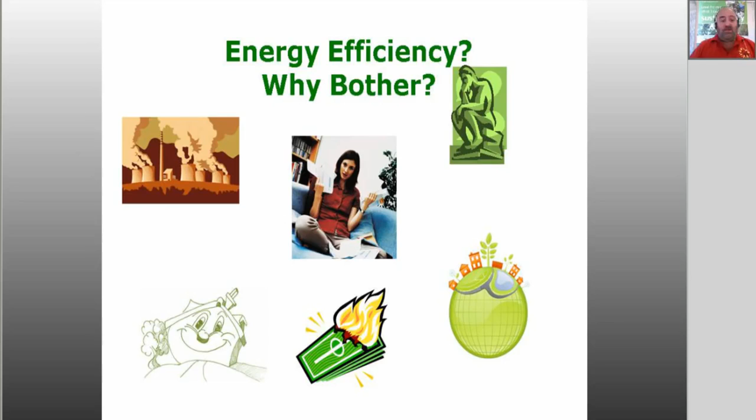Now, there's going to be a combination of slides. It may look like we're jumping backwards and forwards a little bit, but bear with me. It will all make sense at the end. So let's go on to the next slide. Now, what is greenhouse? One of the main drivers, of course, for the ATA is sustainable technology to improve the planet, or at least to reduce the harm that we're causing.

And a lot of people get confused about what is greenhouse, what is greenhouse gas, and what are greenhouse gases, and what is the impact. Now, if it wasn't for the greenhouse effect, we wouldn't be here, because it's a natural part of the Earth's atmosphere.

And this is how we've evolved. We've evolved in this temperature range. Now, if things change, and they change quickly, we could be in a little bit of trouble. So the enhanced greenhouse effect, what we're doing now is, with fossil fuel burning, etc., putting extra greenhouse gases into the atmosphere, which is trapping a bit more heat.

Now, the impact of that is you still have to have an energy balance. In other words, all the energy coming in from the sun has to match all the energy leaving, or otherwise the temperature rises, and that's exactly what we're seeing now. The temperature's rising, and scientists predict that we could have a 1.4 to 5.8 degree temperature rise over the next 100 years, with potentially devastating effects on our societies and well-being.

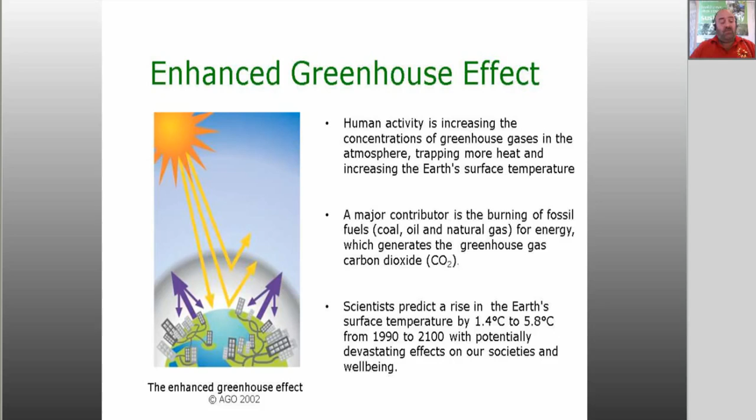Now, so how do we avoid all this, and how do we make our lives more comfortable, and how do we ease the pain on our hip pocket? And one of the answers, of course, and one of the things you can do personally is energy efficiency in the home. So let's have a look at the Australian energy home use.

Now, I haven't broken those down because there's no good reliable data as yet that I've been able to find. But there are things like televisions and stereos, home entertainment systems, just all the odds and sods, mobile phones, computers, all those sorts of things just add to that. But by far, heating and cooling and water heating are the main components. And there's also a fairly good slice of lighting and refrigeration, which we can do something about straight away. And so they're the aspects that we're going to talk about.

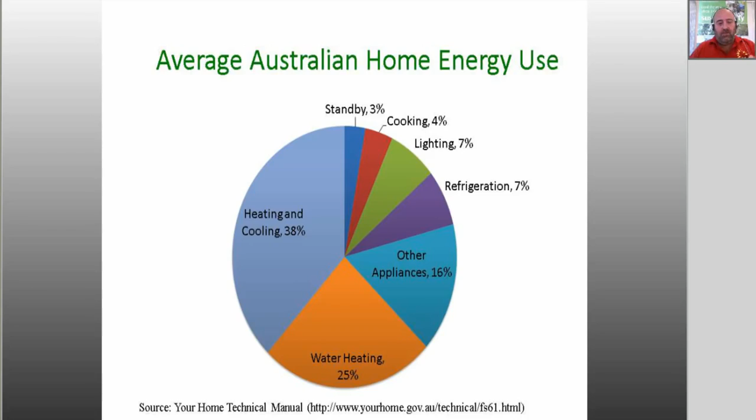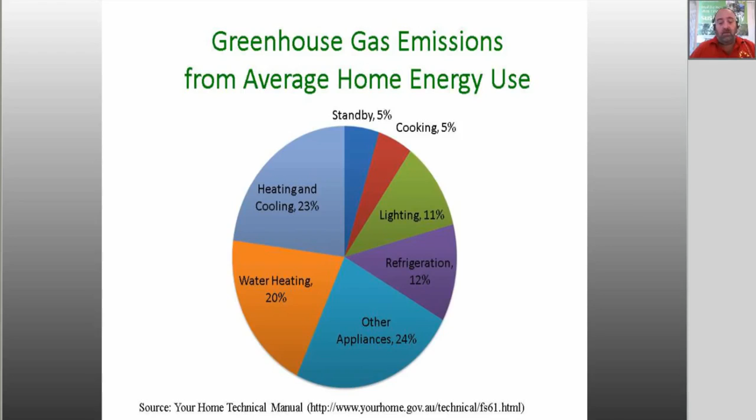Now, comfort zones. Most people are very surprised to find that we can actually cope with quite a wide range of temperatures, and most people are comfortable between 18 and 27 degrees. So the key is that 22 degrees, as some of the ads on TV have portrayed, is not the ideal temperature. The ideal temperature is somewhere between 18 and 27 degrees.

Now, of course, some people will feel the temperature when it gets a bit warmer more than others, and some people feel the cold more than others, and that's to be expected. But by and large, anywhere between 18 and 27 degrees is comfortable for most people. So what you can do is, in summer, you can allow the temperature in your house to rise a little bit higher, and so keep it up around 24 to 27 degrees. Some people don't like it above 26, because every extra degree adds 10% to the cost of trying to keep your house cool.

So if you have a house that actually gets to a certain temperature and you're running air conditioning, if you keep the air conditioning up a little bit higher, or at least the temperature's up a little bit higher, then you'll save a lot of money for no real discomfort. And conversely, in winter, the same thing applies. You can drop the temperature down, not try and heat your house up so high, and it will also save you quite a bit of money.

Now, I had a friend who, in winter, would have a house so hot, up around 25 to 30 degrees, that as you walked into the house, you had to strip off down to your shorts and T-shirt, and it was just shockingly hot inside the house. And if you had the temerity to turn it down a little bit, she'd jump up and down and hurl abuse at you. But this same woman in summer would keep the house at 18 degrees because it was far too hot outside. So it depends on what people get used to and how they develop habits.

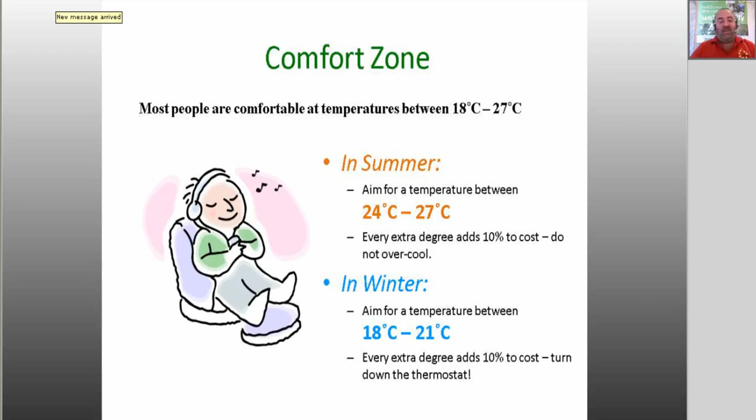And a lot of this is about habits, and one of the things that we will talk about is there's a difference between habits, behaviour, and retrofits, so turning that up, down, putting on a jumper when it gets a bit cold rather than turning the heater on. Their behaviours, their habits, turning lights off when you leave a room. The other thing is retrofits. So putting insulation in your ceiling, for instance, is a once-off retrofit. You don't have to think about it anymore. So there are two aspects to that. As somebody said, warm slippers, long trousers, and long sleeves. That goes a long, long way to making you more comfortable when it gets a little bit colder.

So keeping your home cool. What are the key ways that you can keep your home cool? Obviously, closing windows and doors during the day to shut out the heat, controlling cross ventilation at night, in other words, allowing cool breezes to come in, and helping your home stay cool is designing for passive cooling, which we'll talk about in a few minutes, insulating, protecting your windows, and eliminating air leaks. And those, particularly eliminating air leaks, can play a big, big part.

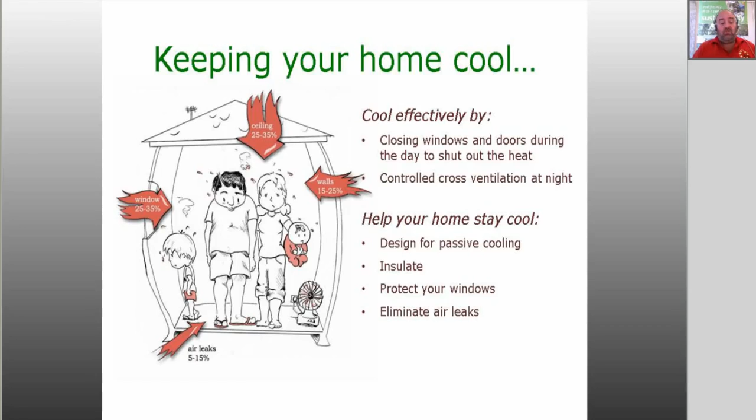So as you can see there's quite a lot of heat that comes through windows, through ceilings, through walls, and even through the floor, as we'll see in a minute. But if you look down the bottom there, you can see that air leaks contribute to 5 to 15%, and other studies have indicated it could be as high as 20%. So it makes sense to control some of those air leaks if you want to keep your house cool. And again, you'll be more comfortable when you do that.

Now, what about keeping your house warm? Well, using effectively a correctly sized heater, creating zones. In other words, don't heat up the whole house. If you're sitting in the lounge room, why heat up the bedroom? So creating zones so that you can actually heat up just the parts of the house that you're in. Using thermostats and timers. How many people have gone to work and forgotten to turn the heater off, and come home to find the house is sitting at a beautiful 22 degrees, and the cat looks up in appreciation when you've walked in the door because you kept the house warm for it all day. So having timers on your heating systems and cooling systems can play a big part.

In my house, because I've got restrictions in the number of zones that I can put on, I actually have a thermostat and timer which automatically drops the temperature down overnight, automatically switches everything off at around 8 o'clock in the morning when people are getting ready to work, and doesn't come back on until we get home from work. So if you do have an automatic system, make sure you use it because it'll make a big, big difference.

Circulating hot air. Now, it sounds funny, circulating hot air to stay cool, but we can actually cool down quite effectively if we have a moving airstream over our bodies. So if you have a ceiling fan, turn the ceiling fan on and direct that air over your body. It causes a little bit of evaporation and helps keep you cooler. However, when you leave the room, turn the fan off, because the fan by itself doesn't actually cool down the room. It cools down your body because of the moving air. So when you leave the room, turn the fan off, otherwise you'll just be wasting energy. And of course, wearing more clothes to reduce heating needs. Gets cold, put a jumper on.

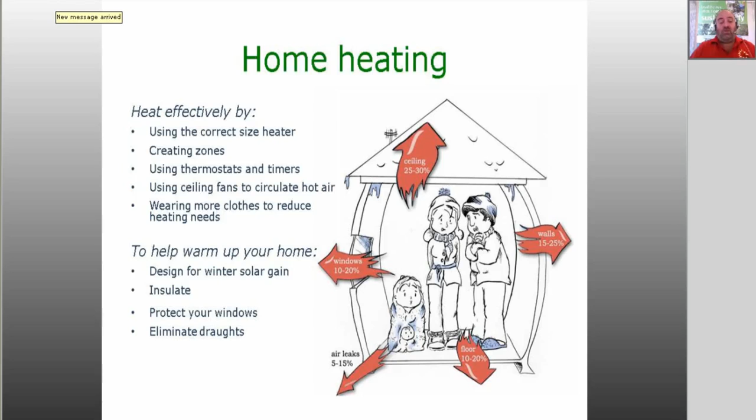So the three key things that can keep your house cool in summer are the same three things that keep your house warm in winter, and that's insulation, protecting your windows, and eliminating drafts. So keeping the cold air out in this case. And you'll see that there's some really simple solutions for eliminating drafts. The key thing you want to do when you're eliminating drafts is control the ventilation. So it's only controlling the ventilation when you want the ventilation, rather than when the wind outside decides you want the ventilation.

So what kind of heating? We're coming up to the winter season now, so particularly in the southern states it's going to be an issue, not so much in the warmer states. Now, types of heater. There's small portable heaters, single room heaters, ducted, whole house, and each of them have their advantages and disadvantages. But go with the ones that are going to do the job properly for you. There's no point getting a whole house heater if you spend all of your time in the lounge room, for example. There's also no point in filling up your house with several small heaters and trying to run them flat out to heat up your whole house. So it has to be the right size for the right job.

And that's very important. Now, small single room or portable heaters can be excellent for just sitting quietly in the corner, reading a book or watching a bit of TV. There's also gas, electric, reverse cycle air conditioning, and each of those have their advantages and disadvantages. Of course, gas isn't available everywhere. Not everybody has access to mains pressure gas, and even if you do use LPG, it usually works out 2 to 3 times the price. There's also greenhouse gas emissions associated with gas, which you can eliminate fairly simply with electric by using green power, which we'll talk about as well.

Now, electric, there's fan, radiant, oil column, and reverse cycle air conditioning. Reverse cycle air conditioning is actually quite a good system for heating up your home if you have electricity only, because reverse cycle air conditioners can be 3 to 4 times as effective as normal radiant, fan or oil column heaters to generate the heat because of the way they work. So when you're looking, and we'll talk about energy rating labels very soon, have a serious look at reverse cycle air conditioning for heating if you are restricted to electricity for your heating needs.

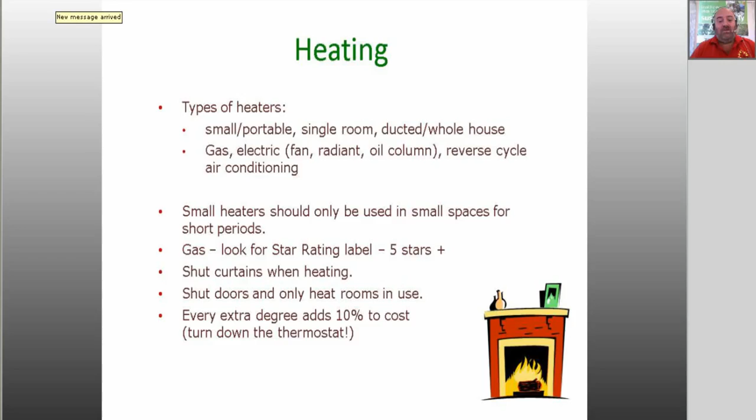Now again, look for star rating labels. Do the clever thing, shut the curtains when heating, shut the doors and only heat the rooms in use. And again, every degree that you raise the temperature adds 10% to the cost. So turn down the thermostat and put on a jumper. I met a guy who said he was a classic energy waster, that when it got a bit cold he turned the heater on, and then when he started getting hot he took his jumper off. So don't be sucked in by things like that. It's very easy to get into habits which are counterproductive, and going through and checking things will make a big difference.

Now, the other part of heating, passive heating and cooling, which we spoke about a little earlier, is simply letting winter sun in and keeping summer sun out. As we know, the sun rises in the east and sets in the west, and it does so twice a year. The rest of the time, the sun moves around in the sky. So it changes position where it rises and sets, and also changes its position up or down, depending on what time of the year it is. So you can see there that the winter sun, when it's low in the sky, can penetrate in, which is a reason that eaves are so effective in houses, and it's a crying shame that builders have chosen to get rid of eaves, mostly for cost purposes, but they've convinced people that they're not necessary and they don't look very attractive.

But having eaves on your house can go a huge way to getting good passive heating and cooling. So providing access to the low winter sun and excluding the high summer sun can make your house very comfortable, or a lot more comfortable, and also allowing cooling breezes to come in. So having a house set up, or even if your house isn't ideal, opening the windows in various parts of the house to let a cooling breeze come through can make a huge difference.

And as you can see in the diagram there, using deciduous trees that let in the winter sun but block out the summer sun is a huge advantage, as are things like vines or grapevines or something grown across the north side of your house. Now, the only problem with having trees and grapevines and things doing that, as we found out at the ATA workshop at the Ceres Environment Park, is that it doesn't always follow your heating and cooling needs.

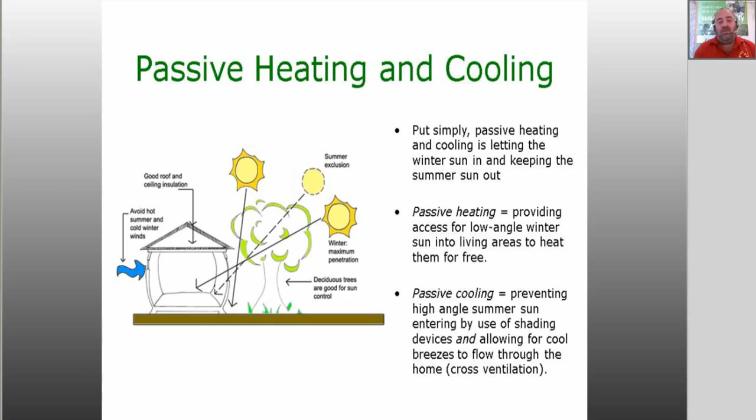So it may not be perfect, but it's certainly a lot better, but you may find that you still need to put some external shading up, or hack back the vines in some cases to get good autumn and spring performance as well. So just be a little bit aware of that. And again, with all of these things, it's all about looking to see what works and what doesn't work in your individual situation. Now, insulation is one of the key things that will help make your house more comfortable.

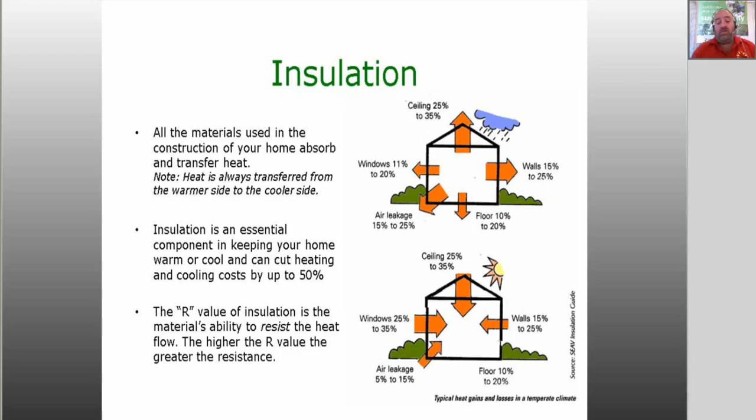Now, it's important with insulation to realise there's two kinds of insulation. The R value, by the way, is just its ability to resist the transfer of heat. Now, the two types of insulation are bulk insulation, which resists the transfer of heat, and it does that by trapping air. And air is an extraordinarily good insulator, provided it doesn't move around. So most of the insulation properties of bulk insulation, like fiberglass bats or cellulose fibre, is the air trapped inside the bats.

Some people make the mistake of thinking, oh, well, I've got an R2.5 bat, I'll shove another R2.5 bat in there and squeeze the two together and I'll get an R5 bat. But it doesn't actually work that way, because what you're doing is you're squeezing out the part that does the insulation, which is the air. So you actually end up with a worse performance by compressing insulation down in there.

The other kind of insulation is aluminium foil laminated onto paper or plastic. So it resists the radiant heat by reflecting most of it away, and it's also not very good at transmitting or radiating that heat away when it gets hot. And you can do an interesting little experiment, carefully of course. If you've got a black cast iron cooking pot, you can feel the heat a long, long way away. So you don't have to get your hand very close at all. But you have to get your hand very, very close to a clothes iron, because it's got a shiny surface and it doesn't radiate the heat away.

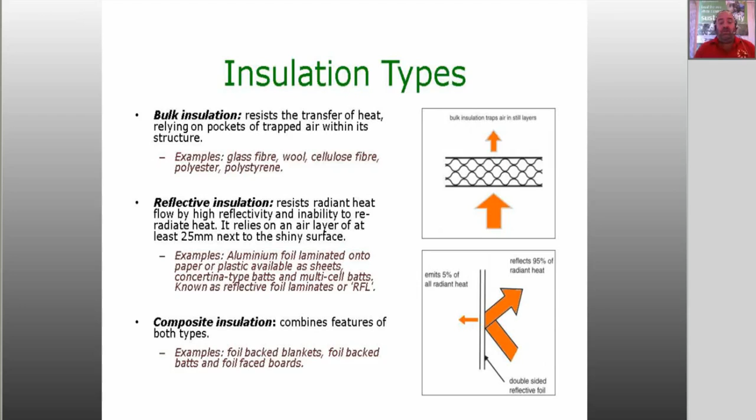So the best sort of insulation is often composite insulation, which features the best of both types. Now, if you want to see an example of how effective good insulation can be, have a look at these thermal images of two houses, one with poor insulation and one with good insulation. And you can see straight away the blue colours are cold and the red colours and orange colours are warm.

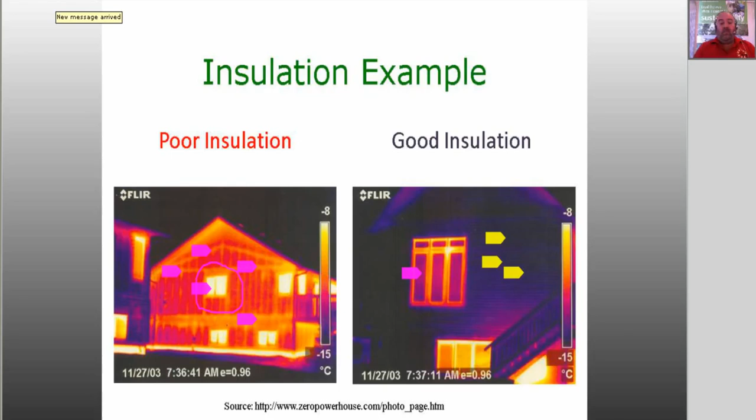And you can see around the rest of the house that it's very, very cold. And that's probably the most obvious example that I've ever seen of how much of a difference insulation can make. So, insulation is paramount if you want to have an energy-efficient home.

Now, what about the windows? We just saw in that previous slide that those windows were radiating quite a lot of heat. Now, an unprotected window can cost you up to $200 or even more these days, because I think that $200 was back in the day when heating and cooling was just a little bit cheaper, like 6 months ago. Double glazing is a great thing for putting in the windows.

Double glazing hasn't had a good history in Australia because in most places of Australia we've got a relatively mild environment. Plus we had really cheap energy prices, although they're slowly rising. But of all the things that I did in my house, one of the things that I regret not doing was putting in double glazing. It would have made a huge difference to my heating and cooling costs. What I have done in the house is put in heavy curtains and pelmets, which we'll talk about in a second, to help offset that problem.

But with double glazing, the initial cost is high, and a few years ago, double glazing was ridiculously high in Australia, but it's coming down to better and more affordable levels now. But as I worked out in my house, if I had had the extra expense in double glazing up front, I would have more than paid for it several times over in my heating and cooling bills over the last 17 years. So it's, as I said, one of the few regrets.

Now, if you don't have double glazing in your house, you can actually retrofit double glazing. There are a couple of different companies around. The cheapest and easiest is a product called Comfort Windows, and I have no association with the company. It's just one that I'm familiar with, and I describe it as industrial strength cling wrap. So it actually gets temporarily glued on and provides a gap between the window glass and the plastic. And there are a lot of other alternatives around as well for retrofitting double glazing, including some do-it-yourself stuff.

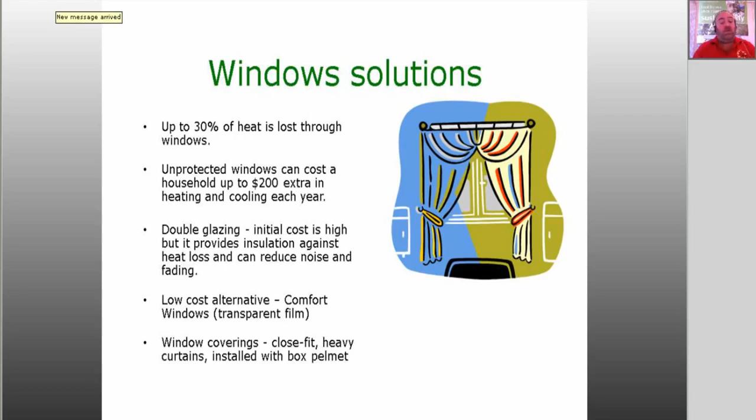The other thing you can do is window coverings: close fit, heavy curtains installed with a box pelmet. And the reason that heavy curtains with a box pelmet work so well is because they do the same thing as double glazing. They trap a still layer of air in between the window and the room, and the air insulates the room exactly in the same way that bulk insulation does. So let's have a look at pelmets and how pelmets stop the chimney effect.

You can see around here that right in there you've got cool air flowing down between the curtain and the window. Now, if you've ever stood even by a sunny window in winter and felt the cold air coming along your feet, you'll see that effect straight away. So you have the cold air coming down, the warm air hitting the window, cools down, drops to the ground, runs across your feet, goes back to get heated up again.

The warm air comes in behind it and drops down again, and then the heat radiates out through the window. And that's exactly what you can see happening over there. Now, if you put this pelmet up the top here, what you're doing is you're preventing that cold air from flowing down behind the curtain, and now it flows down in front of the curtain and leaves a layer of still air in behind the window and the curtains.

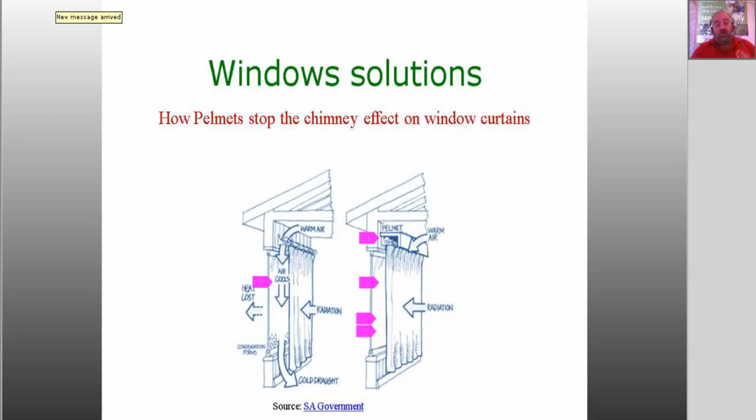And that layer of still air provides insulation between the room and the outside. So you can actually see that the warm air will then just fall down beside, and you won't get that heat flowing out through the window anywhere near as much.

Double glazing. If you're going to go double glazing, why does double glazing work? It works in exactly the same way. You see on the left there's a bit of detail about how double glazing is constructed. There's 2 sheets of glass. There's a sealed airspace in between. There's a spacer bar down the bottom here to provide the spacing. And also there is some moisture-absorbent material, a bit like the silica gel you get when you buy a pair of shoes or buy some electronic components.

And again, the layer of air inside stops the heat travelling through the window. So you can see on the right-hand side there that the heat stays inside or stays outside, depending whether it's winter or summer.

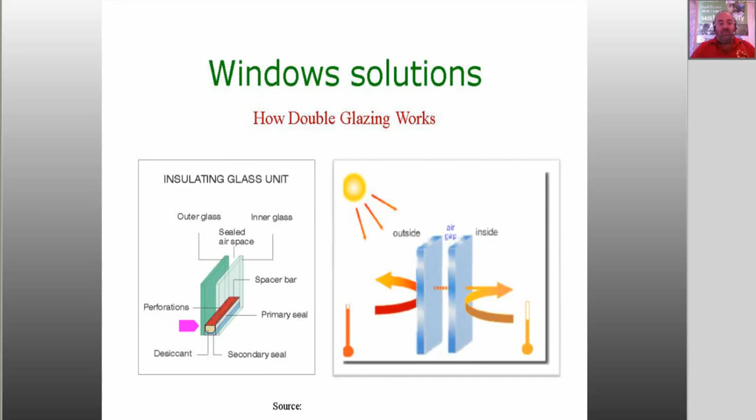Let's keep going because we think we're running a little bit behind, and I spend a little bit too much time explaining some of these slides.

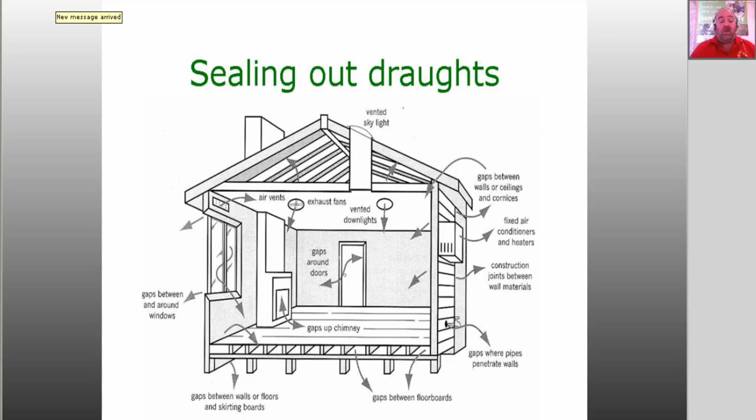How can you clean up gaps and cracks? There are some really, really simple ways. One of the best ways, of course, is the old door snake down behind the door. Ask your grandma, she probably had one. Weather seals, caulking up windows, and there's examples of some of the weather stripping and caulking compounds there, and sealing fans.

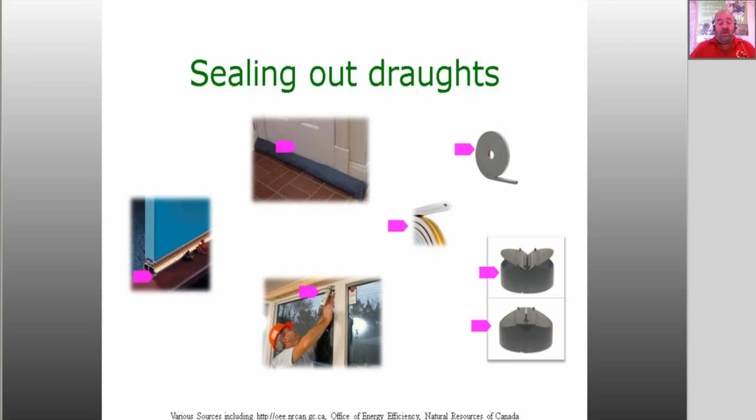Now there are plenty of other things like sealing off your fireplace if you have a fireplace. Closing up the vents that are in the top of old houses. If you've got an old house, especially timber or an old weatherboard or brick veneer house with the vents near the ceiling, they are just holes in the wall to stop you suffocating when you're using kerosene heaters. You can actually close a lot of those up, provided you don't use unflued heaters.

And the final one, we're running completely out of time, but lighting solutions. We're all familiar with old incandescents. We're also familiar with new fluorescents, which are a much better solution. And LEDs are coming up. If you want good information about LEDs, see the current issue of Renew magazine, issue 119, which has a complete breakdown and a buyer's guide for LEDs.

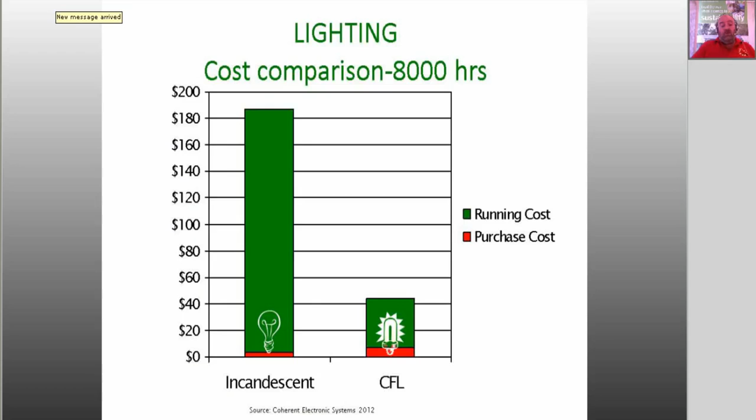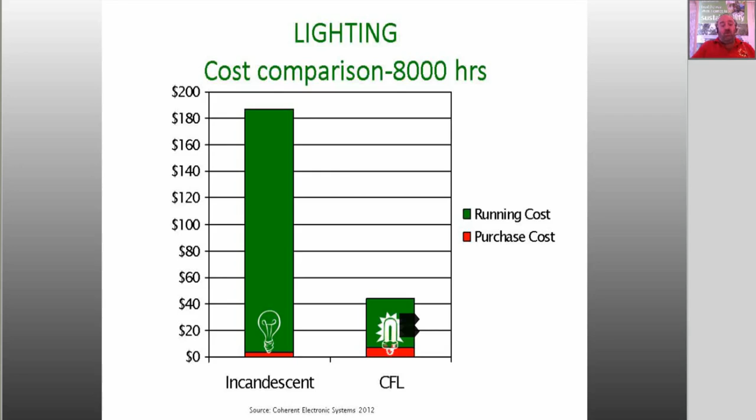One of the big reasons they're becoming so popular is because they're so versatile. They're actually cheaper to run than compact fluorescents. And as you'll see in the next slide, cost comparison running a CFL versus an incandescent, you can see massive savings with today's electricity prices. I expect LEDs to come down to about here or maybe even here in overall cost very soon, with much better options for replacing a lot of different things. So LEDs are definitely the way to go. But if you're not ready for LEDs, certainly use CFLs.

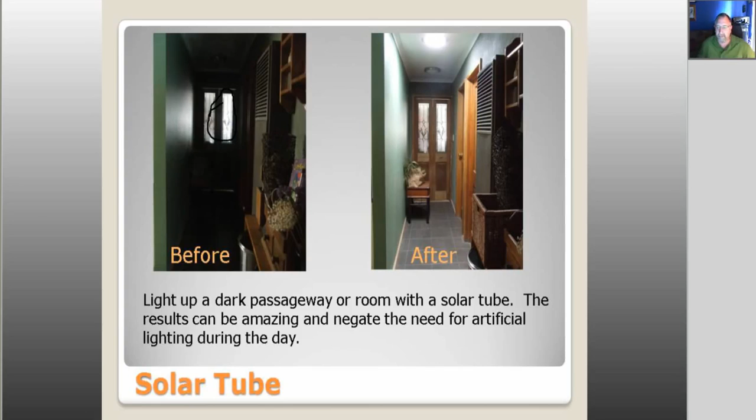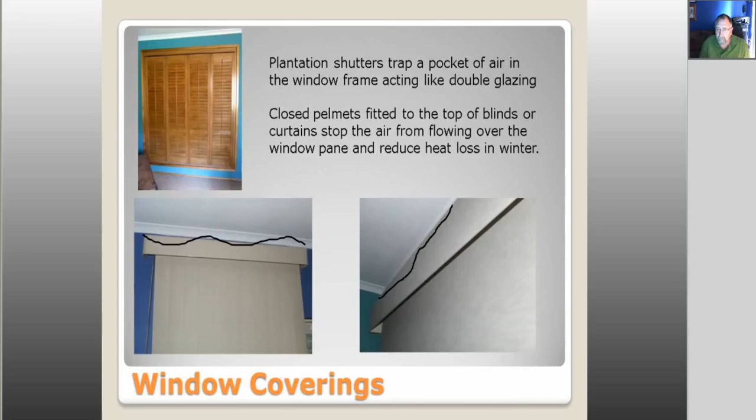So the next efficiency measure we took at our place was to retrofit solar hot water. Now, we had an existing gas hot water service, and it was working fine. It was a 6-star gas-rated hot water service, 300 litres, and basically I didn't want to get rid of that because we'd already had the capital investment for it. So what we did, we basically bolted on a solar hot water service. This one was one that Origin Energy were offering for $2,100 back in 2007. It's probably a bit more now.

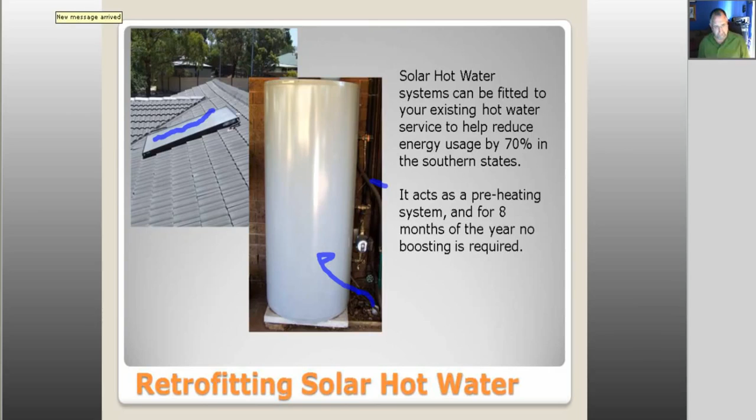And so for about 8 months of the year, we don't need the gas hot water service boosted at all. Once the water temperature goes below about 45 degrees, I turn the gas back on again for the winter, but it's still boosting during the sunlight hours. So it works quite well. So that's an example of retrofitting a solar hot water service onto your existing gas or electric. Certainly cuts the bills down. Our savings for natural gas have been in the line of about 75% just by installing this.

So other things around energy efficiency, we monitor our stuff here. I just do basic readings off of the meter, and I graph it in Excel to look for abnormal energy spikes. I basically use a PowerMate, which I actually purchased from the ATA, and it's a really good tool that you can sit there and measure an appliance for a 24-hour period, and you can actually tell roughly how many kilowatt hours it would use over the period of a year. So then, if that thing breaks, you can replace it with something more energy efficient.

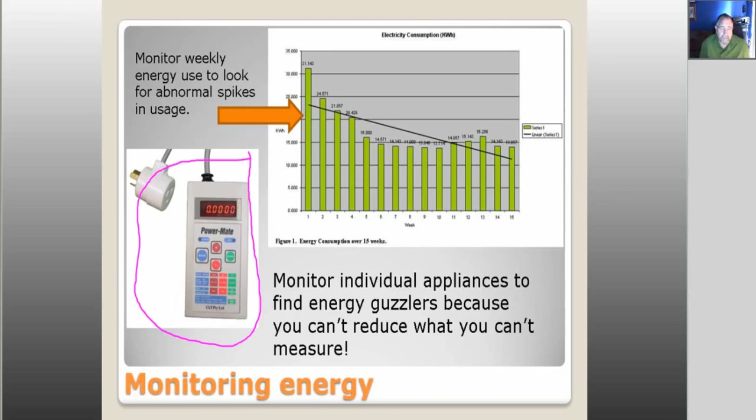So yeah, you can't actually measure any. If you can't measure something, then you don't know how to make the savings. That's basically what I'm trying to say there.

Some of the other things we do around the home are turn off appliances when not in use. So, for instance, the computer I'm talking on now, we turn that off at night. We've got a power board, all the peripherals are connected to it, and we simply turn it off. Same as our entertainment unit. When we don't watch television, we simply turn off all the appliances all in one hit.

And for those people who have the power point stuck behind, there are actually units like this one here that have a remote switch that you can plug the power board into. There are pedestal switches for your feet as well, and they work very well.

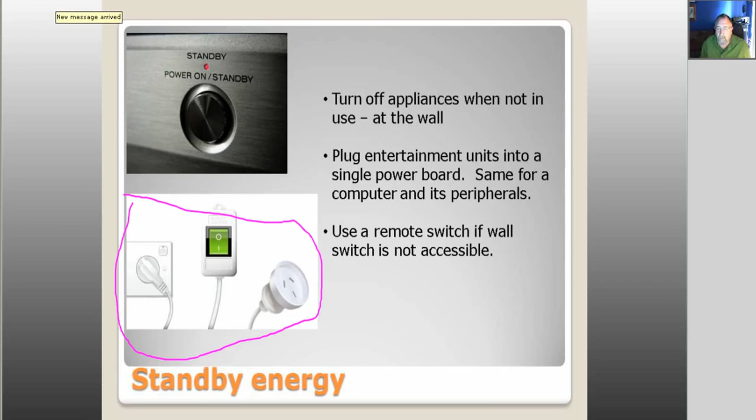So one of the things we do when an appliance breaks, we try and do without it for a few weeks, other than the refrigerator. And we've done that for just about every appliance that's broken recently. So we think of other ways that we could do the task without using the energy. After the few weeks of waiting, we make a conscious decision, which is a good thing to do, and see if we can get along fine without it.

We also have clothes airers that we can put outside or use the clothesline, just a normal old Hills hoist, and that works fine. In winter, we put the airing racks in front of the sunny north-facing windows, and they warm dry the clothes, no problems at all.

So when you're in the market for a new appliance, if you do make that conscious decision, there's a few things you can do. You can look for the highest Energy Star rating, which gives you an indication of the lowest kilowatt hour utilisation over a year. You can look for needs, not wants. You really have to think about whether you need these appliances or not.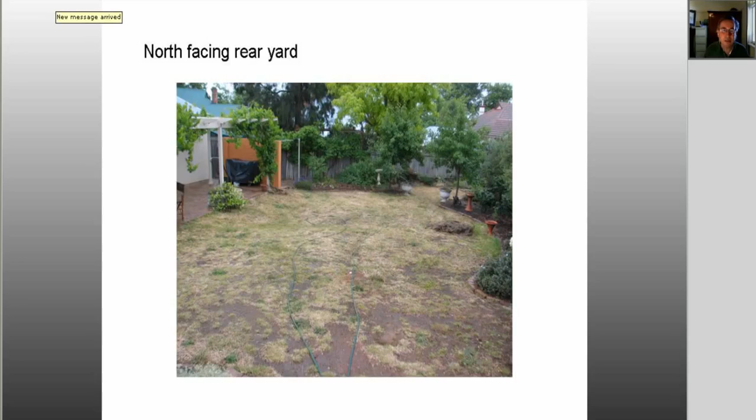The place had a lot of really nice old original windows. These are wooden framed, with coloured glass in the tops and bottoms. And we were trying to work out how we could insulate these windows to get some sort of double glazing in there. We did quite a lot of research looking around to see what we could do in terms of double glazing.

It also had really nice patterned pressed metal ceilings, but on top of the ceilings there was no insulation. There was just a lot of dirt that had accumulated over 70 or 80 years. So we started thinking about how we could do something about the roof as well. But in general terms, it was pretty cold when we started in our first winter.

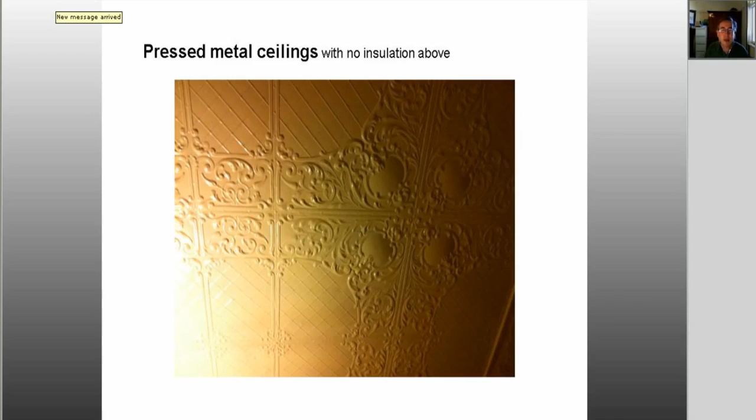It was also incredibly drafty, and one of the things we realised is that they'd removed all the carpet and hadn't done anything about blocking up the gap between the floorboards and the skirting board. So we bought a whole lot of that sticky back sponge stuff and basically went around the whole house, filling up these fairly large gaps, some of them half an inch wide.

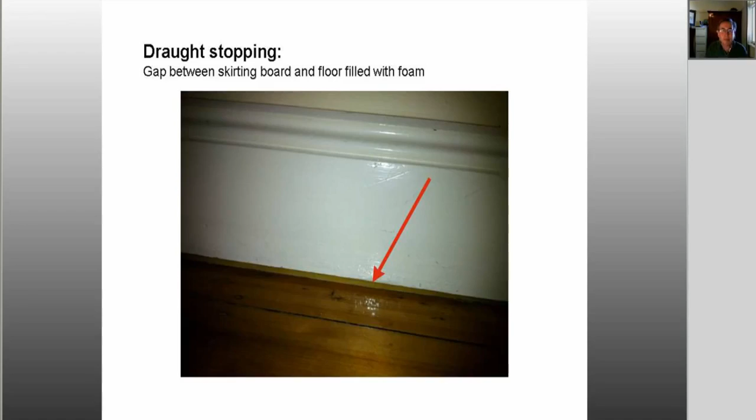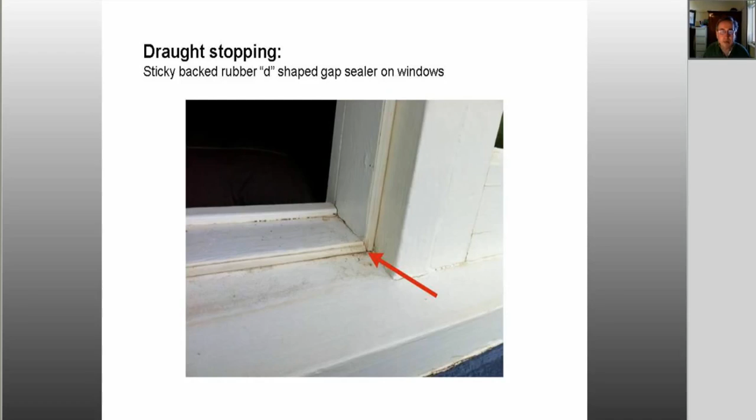This one here was facing west, and in the winter, Goulburn cops a fair bit of wind for 2 or 3 months, so it was getting very cold there. So we went about blocking up all these gaps with this sponge. At the same time, we started investigating the double glazing of windows, and here's a shot of the window gap where we put in this D-shaped rubber stuff, which stopped the wind getting through the windows, and that blocked out a lot of the draft as well.

But then we started looking at how we would double glaze these windows. This is a shot from the inside. We were trying to work out a process by which we could cheaply double glaze the windows without wrecking them, because we didn't want to make any kind of alterations to the windows.

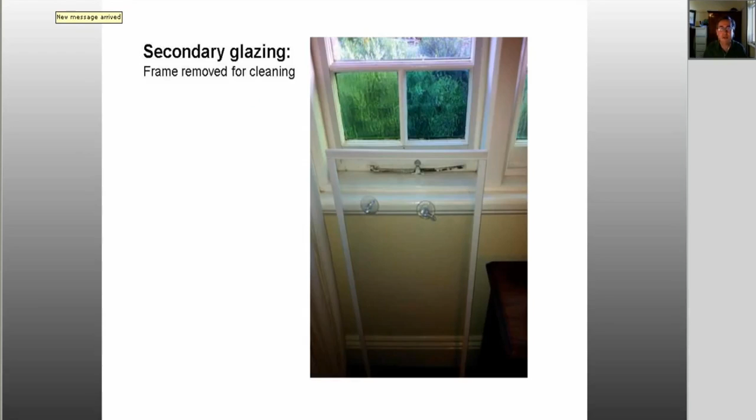It's basically a plastic frame around the perspex, and here's a shot of the back of the frame, and it's just got a magnetic strip that's stuck onto the frame, and then onto the window, a metal strip is stuck onto the window, and when you put the frame onto the window, it just sticks on. Just a very simple sticking on kind of procedure that's easy to pull off. So it's a very simple system.

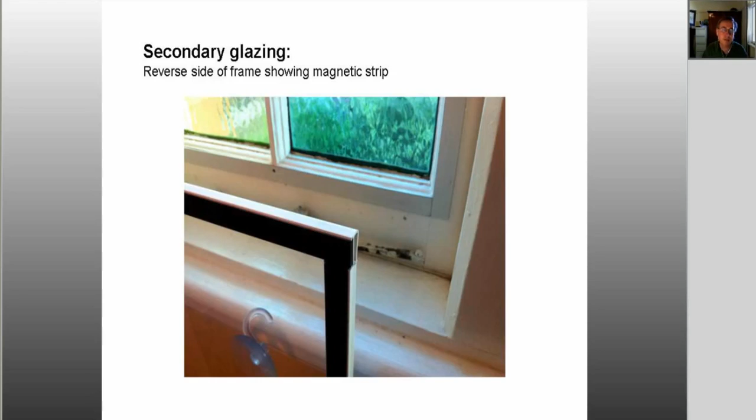It's pricey, but it's nowhere near as pricey as doing double glazing. If you want to maintain your windows and not wreck them, it does actually provide an alternative to cling wrap. It's permanent. We've had it there 3 years. It's easy to clean. We only clean it once a year, and it's a simple system.

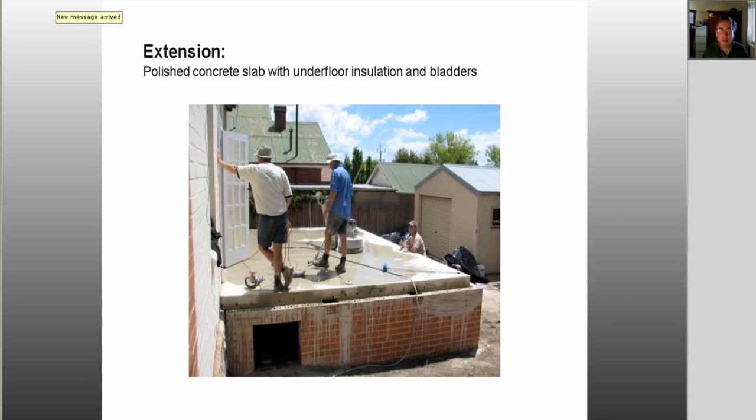What we did at the back of the house is we put in a polished concrete slab, which was insulated with air cell underneath it. This is the north-facing part of the place. We put bladders underneath for water, so we've got a fair bit of rainwater that we harvest for the garden. And then this polished concrete floor takes the sunlight from the north and heats up during the day and keeps the place very warm. That's a shot of the part of the place half completed.

It's a double brick house. We put in double glazed windows and doors, and these are plastic frames, so that we wanted to keep the place looking as much as we could like the original building, but we also wanted to use plastic as a window framing system, and then double glazing on all the windows. Then there's, of course, insulation in the roof, there's air cell in the roof, and there's bats in the roof, plus insulation between the gap and the two brick layers.

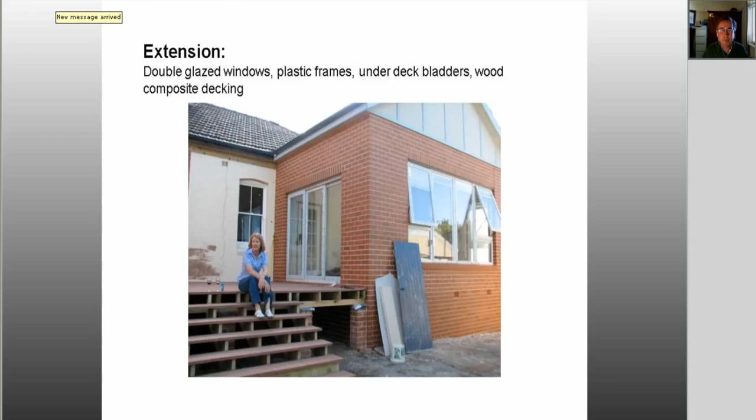The result of it has been to cut down on our heating bills by about 40%. We've put in solar voltaic cells, so we're actually now making money out of our electricity bill. But it's been a good exercise in trying to fix up a house which was freezing, and it's now quite well insulated, and we've cut down our bills considerably. That's about it. Fantastic. Thank you very much, Peter.